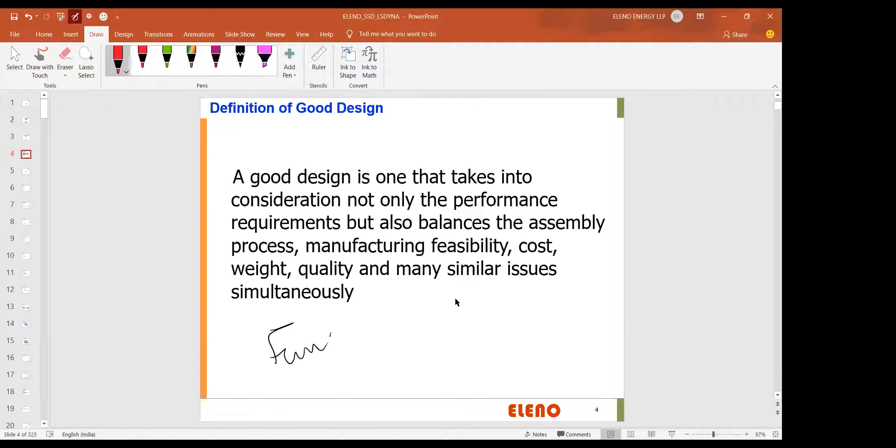Okay, so let's start with a definition of a good design, because we all, even if we are working in CAD or in CAE, we are actually a part of a design team. Okay, so there are going to be 2 or 3 types of designs. There will be a, what I will say, a functional design where we work. So there will be 2 types: one will be functional design, and the other type will be aesthetics.

Okay, so functional design can also be of 2 types. It can be structural, or I will call it engineering, and there is another part which is ergonomics. Okay, so there are things which are not really mattering to the structural aspect, but they are more mattering to the ergonomic aspect, ease of using it, and all these things. So functional design will be either engineering or ergonomics, and then you have another type of design which is aesthetic, which we all know what it is, right?

Okay, now let's make sure that we are taking notes wherever we feel to. Okay, so I'll just read this definition for you guys: a good design is one that takes into consideration not only the performance requirements but also balances assembly process—this is very very important—manufacturing feasibility, cost, weight, quality, and many similar issues simultaneously. This is very very important.

So you can have a design which looks aesthetically very pleasing, but it is made up of a material which is of exuberant cost—it's just not going to play any important role there. Okay, so a good design is one that takes into consideration not only the performance requirements but also balances the assembly process, manufacturing feasibility, cost, weight, quality, and many similar issues simultaneously.

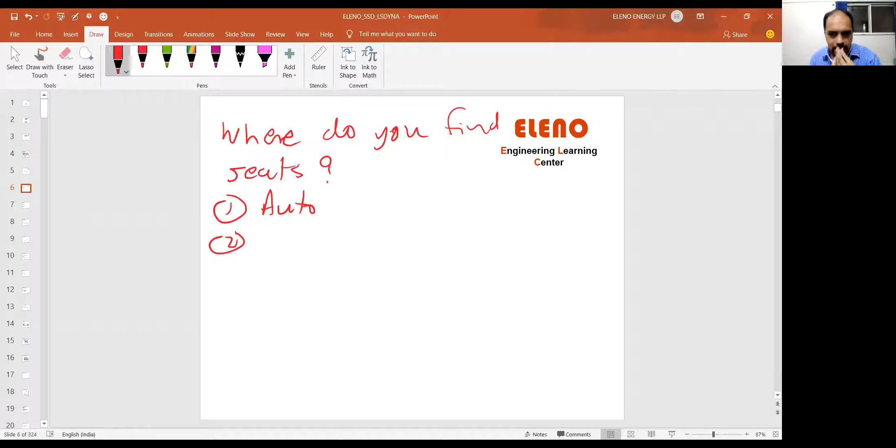It's a car, okay, automotive is one domain. Second, trucks, okay, so I will describe it as automotive. Aeroplane is another domain, aerospace, I will write it down. The third is passenger vehicle, commercial vehicle. So automotive, I will classify as PV and CV. Is this making sense? So automotive, it will be PV and CV.

Trains, yes good, so trains are there, that is railways. Everywhere where we need seating, yeah I know, correct. Transportation, ships, boats, correct. So first is transportation. It can be auto, it can be aerospace, it can be trains, it can be boats, it can be any mode of transportation, right? And then you have some static offices.

Is it right? So theaters, correct Utkarsh, you're right. And even there is a regulation, so it is theaters, that is public places, correct. And there are folding seats and stadium seats. Home, yes, offices, home, library, everywhere you will find a seat, correct.

So roller coasters, yes, it's pretty much an integral part of a roller coaster. Otherwise it's just going to be a pathetic part. But it's just a list, you guys listed it down, correct.

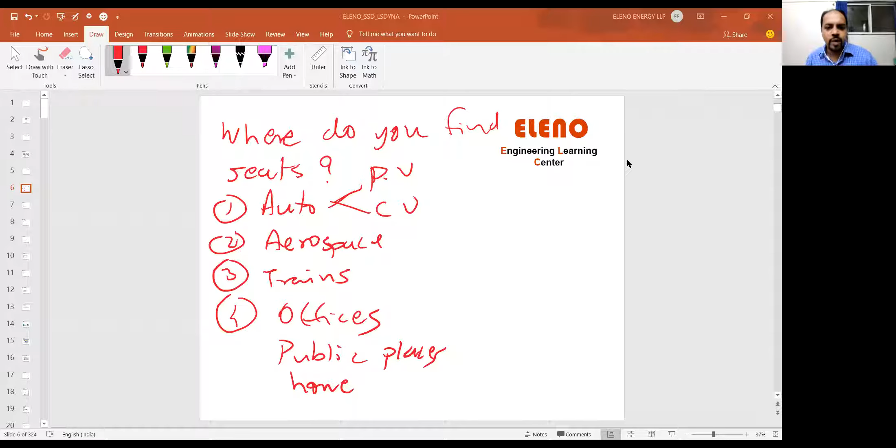So what I want to convey to you guys is, the product is called a seat, but it has various applications, am I right? So the applications are different, and according to application and according to this design definition, you have to actually think about certain tests. And this is actually called, this is something very very important. I try to cover this in the first session of LS Dyna training, which is design validation plan. How are you going to validate your design? Okay, so who decides design validation plan?

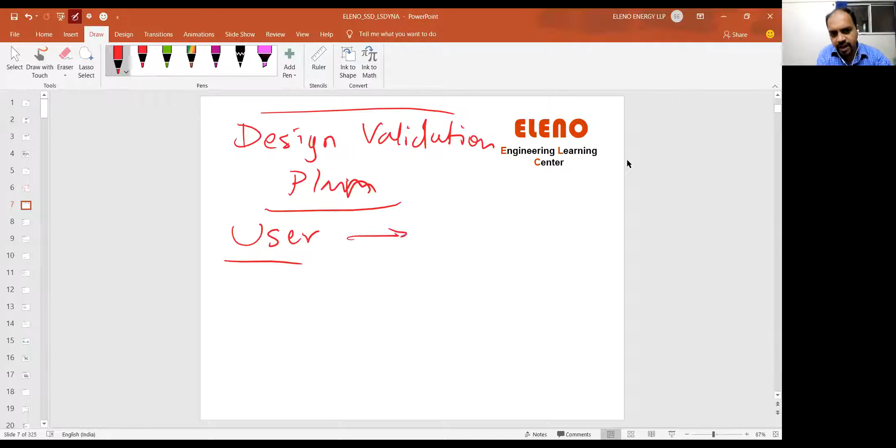A user decides design validation plan according to the application. What do you mean by this? I simply cannot use a train seat in an automotive, correct. It's too bulky, it's not having any adjustments, and it's really really heavy, and it's not made for that particular purpose. It's not public transport, it's maybe personal transport where we have to design a seat taking into account certain considerations. Okay, so every single seating system has to undergo a design validation plan.

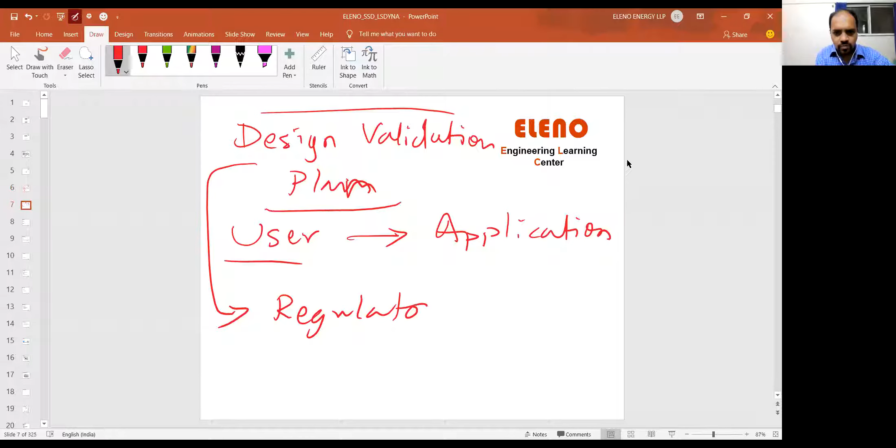It sometimes can be regulatory. Not all of it is regulatory, but most of the time it is regulatory. What do you mean by regulatory? It is mandatory.

For example, furnitures, okay, you may think that anyone can come up with a chair and then just go ahead and launch it. Now it's possible to launch, but the thing is, in the Western world or in developed countries, there are regulations for furnitures because you cannot just fall down. It's called workplace safety. So even if these chairs, revolving chairs, are for static use, they are to be designed for balancing the center of gravity. They are to be designed for maximum weight carrying capacity, and they are to be designed for durability. Okay, so there are regulations, there are some standards. They can be internal standards, they can be government standards, but there are going to be compliances.

Okay, but when it comes to seats, I wrote that in a post. It's the second costliest part or sub-assembly in the entire vehicle. Even the body is not that costly. The second costliest part after drivetrain, it can be IC engine and the gearbox, or it can be the batteries and the controllers and the motors. But that will always be the first costliest part, and the second costliest part will always be the seating system.

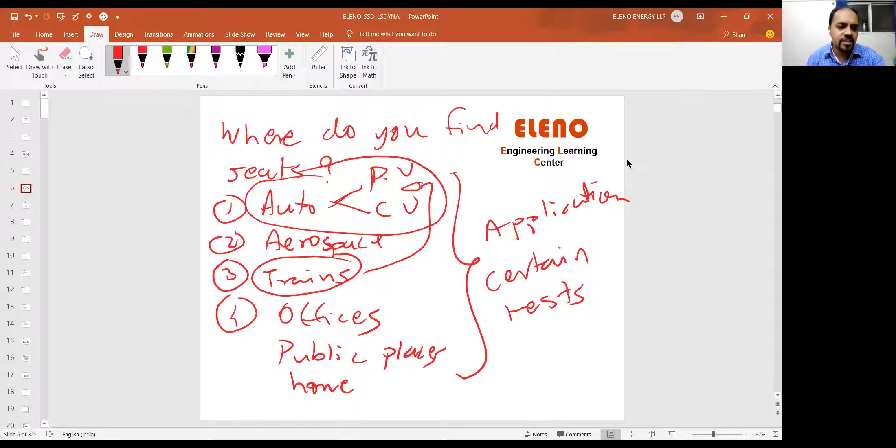And the reason for that, somebody asked me a question why it is so costly on LinkedIn. The reason why it is second costliest is regulation and compliance. Okay, you need certification, you need a lot of certifications related to testing. Okay, so this is very, very important.

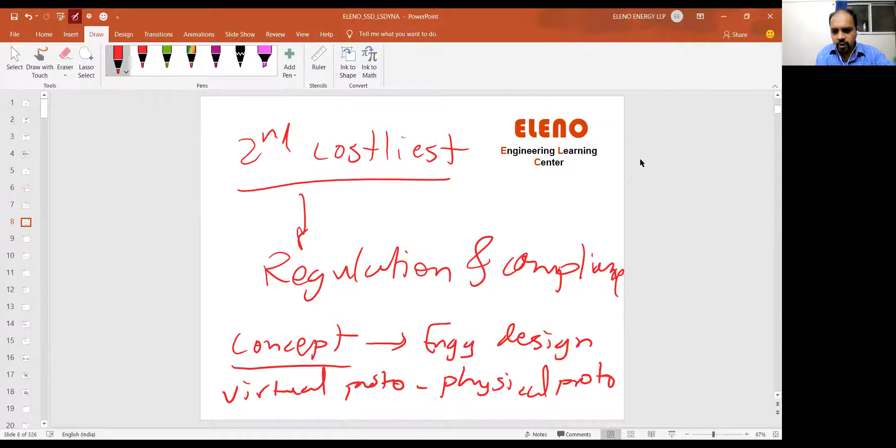For any type of compliance to be done, you have to undergo a process of: concept, engineering design, virtual prototype, physical prototype, limited production. Limited series production, LSP it is called, and then you have full series production. Okay, this is the path you guys have to follow, or any product has to follow if it is going to be a regulatory stuff. And after physical prototype, there are going to be regulatory tests.

Getting my point? What is this cycle?

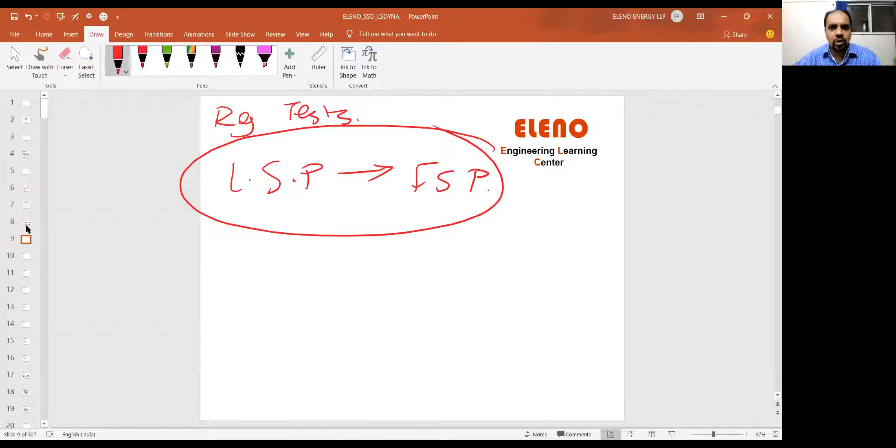It's not just that you have a concept and you launch a product, or you design a CAD, create a 3D print, generate a final production line, and then you're good to go for sales. That's not going to happen. You have to go through a very long and tedious process, because the concept and engineering design itself struggle to coexist. The concept can be exuberant, and converting it into the engineering design is itself a big process. Those of you who are working will understand this.

And then you have a virtual prototype, which is nothing but CAE, which is what this session is for. And then you have a physical prototype, and then you have to go for regulatory tests on the physical prototype, to make sure everything passes. Go for limited series production, then final series production, and your product will be ready for market. Is this all making sense?

I'll give you some 15 seconds, just write it down as a summary. Why the seating system is the second costliest part - this is all applicable to the full vehicle also. But when we are talking about the full vehicle, we are actually talking about integrating various sub-assemblies. Type done once you are done writing.

Okay, some 15 seconds, 10 more seconds. Quick, we have to cover a few things, and I really want you to get a hang of what is a seating system. Type it done once you are done writing. Quick - Tejas, Suresha, Udani sir, yes, Kannan, good, done.

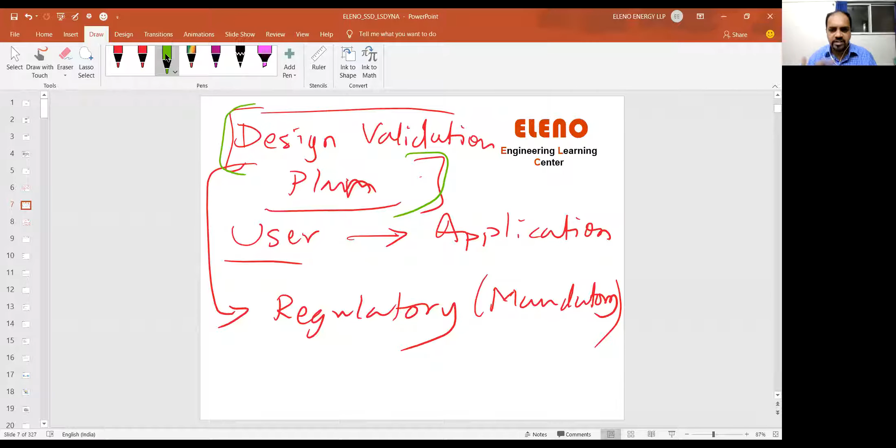It is related to public and occupant safety concerns, so it has to pass through. Yes, correct - that process is costly because it involves physical prototypes, it involves dummies, it involves the testing lab, it involves many things. That's why it is costly, but that is applicable to the full vehicle also. Still, full vehicles are not that costly because they are typically stamped parts welded together, whereas here you may have mechanisms and various other stuff.

Okay, good, so let's move ahead with functions of seat - that is what we are going to discuss. Let's rearrange this. Function of a seat - let's concentrate and make sure we are concentrating on passenger vehicles only. Can you type in PV, passenger vehicles? PV is like personal transport, private transport, passenger vehicles. Type in PV so that we are all in line.

We are only concentrating on passenger vehicles right now because that is the severe-most case, that is very, very severe. Guys, I want you to be active - quick, quick, quick, quick. PV, PV, PV - yes, good.

So there are four functions of a seat. The first is support the occupant, the second is position the occupant, the third is comfort, and fourth is protect. Support, position, provide comfort, and protect - we will discuss all of these in little detail.

So what is a support function? Very simple - the structural integrity of a seat should be sufficient enough to carry the passenger, whether in a static or dynamic environment. If you're taking a corner and the seat bends, that's not structural integrity, that's not support, right? If you are sitting as an occupant and nothing happens, everything is safe, but somebody who is overweight tries to sit on the seat and it deforms or doesn't function properly, that's not something called good support.

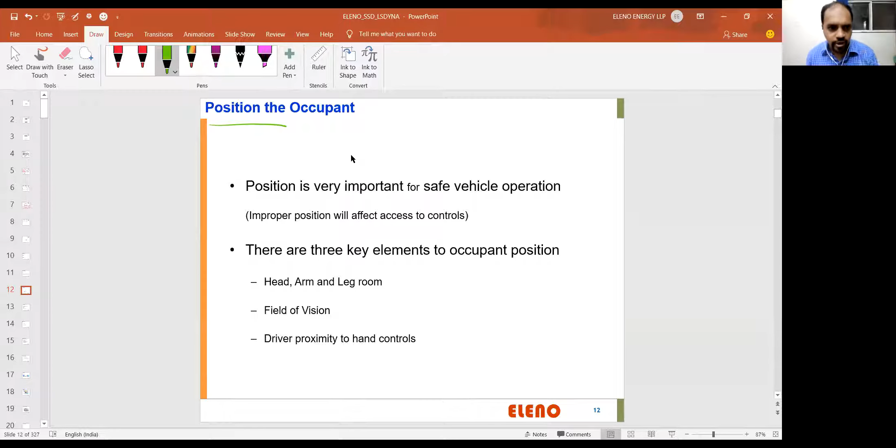Okay, so position is extremely important. Field of vision - I talked about this - should have minimal obstruction from the steering wheel, instrument panel, roof line, belt line, and pillars. What is a roof line? We all know what a roof line is, right? And belt line - belt line is something which is going to be exactly at the shoulders, whatever you see at the end of the door panel, where your window rolling starts. That's your belt line. And pillars - A pillar, B pillar, C pillar - all these things are going to be important as far as the obstruction of field of vision is concerned.

You should not have these obstructions. You can read reviews where there are vehicles with thick A pillars for safety purposes, and they have a blind spot - you cannot see while turning. Okay, how many of you are regularly driving cars? Just type in 'car' - how many of you are regularly driving cars?

Regularly, I'm not saying that you have a learner's permit or a license where it's written that you can ride a car, but you are really not doing it regularly. So there are quite a few people who can ride a car and they can understand it.

The A pillar, if you are sitting in a driver's seat, and if the A pillar is very thick or B pillar is very thick, you get into the blind spot mode. Making sense? So driver should be able to see properly in all mirrors. And who is going to do that? The seat is going to do that, guys.

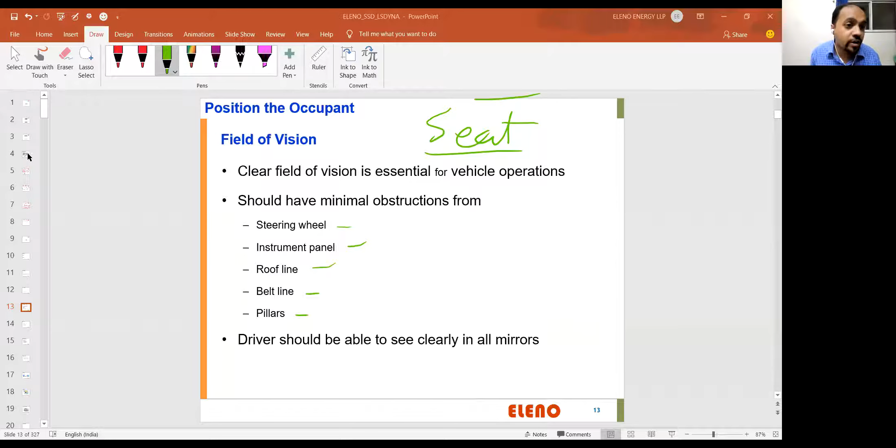Yeah, makes sense, correct? Okay, so this is all to do with seat. Now let's go back to our definition, guys. A good design is one that takes into consideration not only performance requirements. So even if my seat is fantastic structurally and it's not actually creating or balancing cost, weight, quality, and many similar issues.

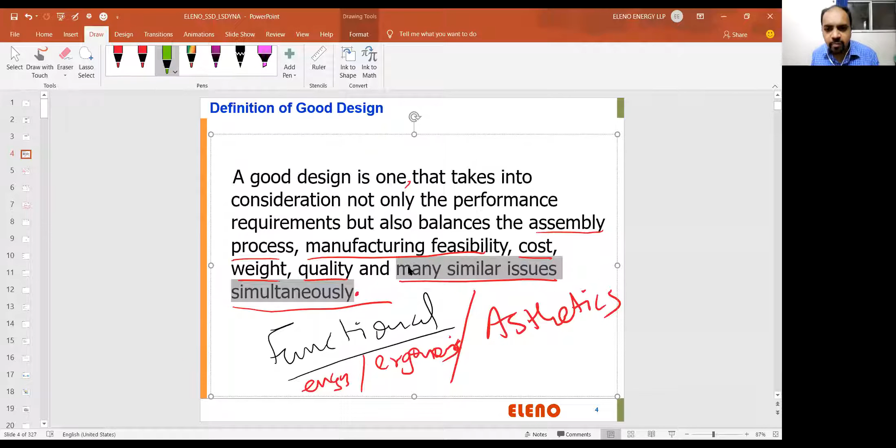This 'many similar issues' includes the field of vision. Can you see it? Can you not see it? Are you getting a lot of blind spots? If I'm 6 feet 5 inches, can I actually get accommodated in the car or not? Am I really made for this car or not? Or if I'm a very short person, if I adjust my seat to the full forward pull-up position, am I still able to see or operate the vehicle or not?

All these things come under many similar issues in a good design. Okay, clear? So let's move to our next point, position. Driver proximity, this is the third point in position of occupant, which is our second base point. The first was, what was the first point, guys? Support. Okay, and this is our second point, which is position.

Driver must be able to reach primary controls while in driving position. Driver should be able to reach secondary controls while in a driving position. So primary controls are, of course, the steering wheel first of all. Then you have indicators, turn indicators. Then you have the pedals, operating pedals, accelerator, brake, and clutch, and the gear lever. So your limbs should be in a position to operate all these primary controls.

The wiper stick is a safety feature, not a fancy feature. You will not see a car which cuts costs by not giving wipers, correct? So it's a safety feature, it's a primary control. Hazard light is a primary control. Then you have lights, the headlights are primary control. Turn indicators are primary controls. All these things are primary controls.

Driver should be able to reach secondary controls, which are like air conditioning, operating the volume, or maybe adjusting the inside rear view mirror a little bit. Then it can be the sun visor, operating the sun visor. All these things come under secondary control. So driver proximity to hand and leg controls, that is something very, very important.

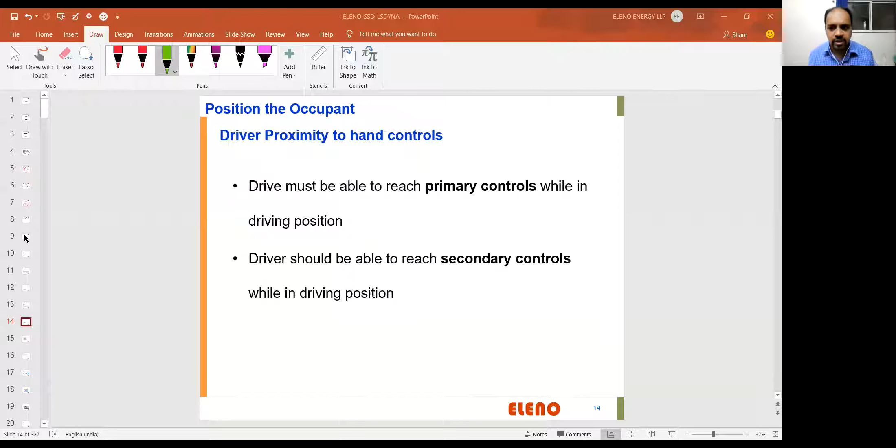Good, nice. Now I want you guys to summarize. I'll just go through it, and I want you guys to summarize in 30 seconds support and position, these two functions. Write in your own words. These slides have no meaning if you don't write it down. So write down in your own words. I'll just scroll it through.

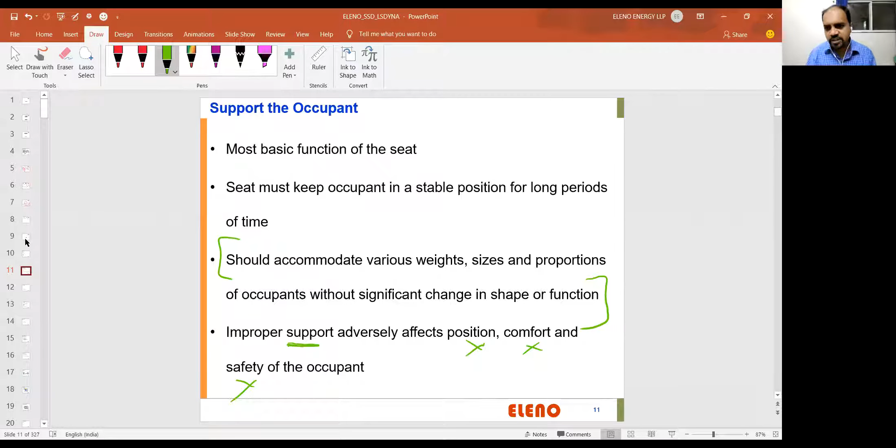Okay, so function of seats: support, position. We have discussed two functions, support and position. So support the occupant is the most basic function. Don't just write it down as it is, summarize it in your brain and just write one liner. Support the occupant, most basic function, and all these things. Just write this down. I'll try to make it two slides at one time. Wait a second.

Yep, can you see this? On the left you have position the occupant, and this is something which you have to write down. Okay, these three slides: position the occupant, field of vision, and driver proximity to hand console.

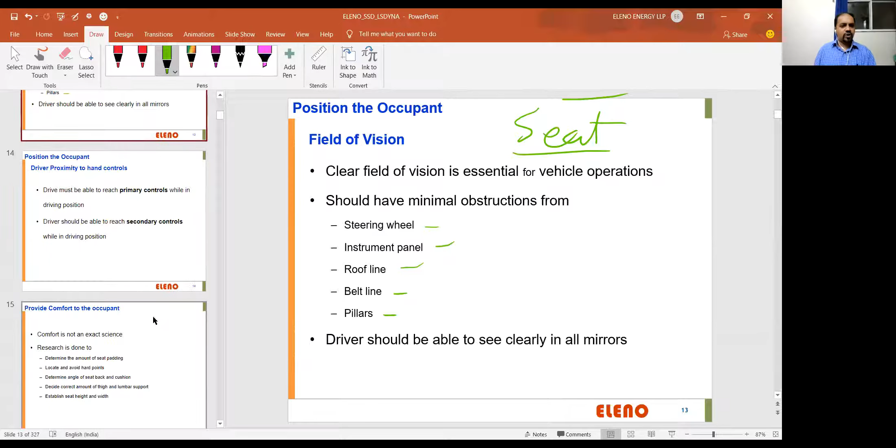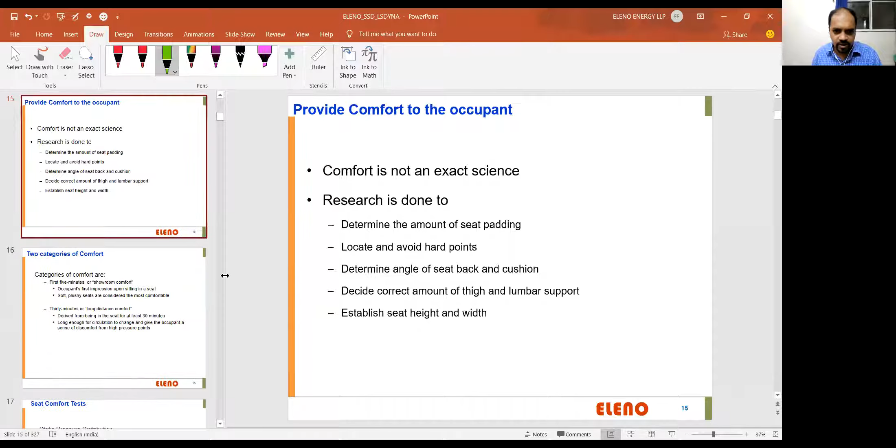Okay, so let's move on with a very, very important type, which is comfort. Comfort is a very, very important aspect, and it involves a lot of CAE nowadays. So provide comfort to the occupant.

Comfort is not an exact science. The research is done to determine the amount of seat padding, locate and avoid hard points, determine angle of seat back, decide correct amount of thigh and lumbar support, and establish seat height and width.

So basically comfort is not an exact science, it's all relative. Everyone is going to have some different perception about comfort. Some may like a hard seat, some may like a soft seat. Soft seats will not provide you support and then you will feel fatigue, numbness. Hard seats will not provide you comfort and still you will feel fatigued out and then you will come out of the car in lesser time. So it has to be a balance for sure.

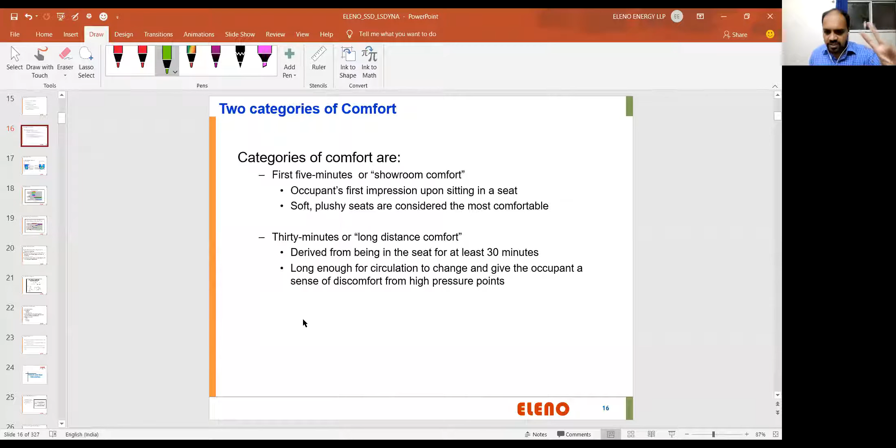Now for that, typically there are going to be two evaluation methods. This is what is written here. The first evaluation method is called 5 minute or first 5 minute showroom comfort. What do you mean by this?

It's like you are trying to go for a test drive on a two-wheeler. On a bike, you are going there and you are going to have a test ride of whatever car you wish to buy. And as soon as you arrive in the showroom, because you were sitting in a harsh environment in a two-wheeler, in the first 5 minutes you will feel that okay, this is very, very comfortable. Soft plushy seats are most comfortable, and all these things you will feel that okay, this is very comfortable. But beware that this is not actually the test ride.

You have to at least go for 30 minutes, 1 hour. You may have to ask your friend to lend a car. Make sure that it is there with you for 1.5 days and try to go on some larger sections and all other things. This is called long distance comfort. So this is not a science, this is all to do with your own self. Then you can have some padding done, and all these things. There are seats, or seat covers, which are very thick, and all these things are there.

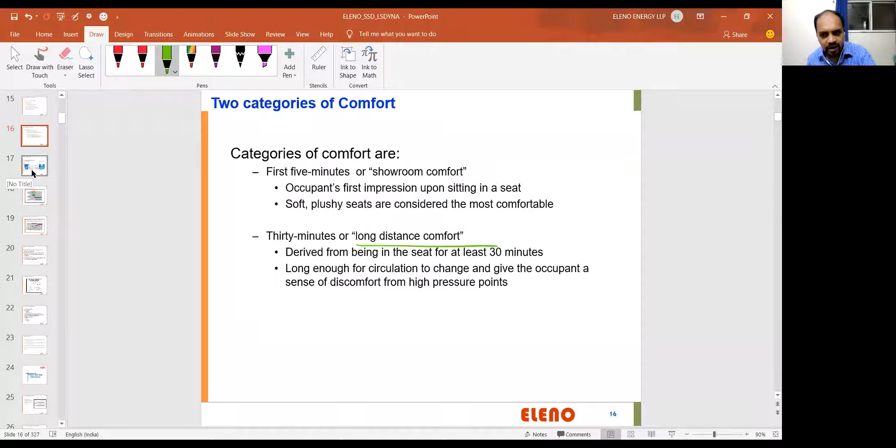But just understand that there are going to be two categories of comfort. Not very important, but it is still there. It matters a lot, it matters a lot when you buy a car. Now this is something which is important, and this is all done in CAE, very specific.

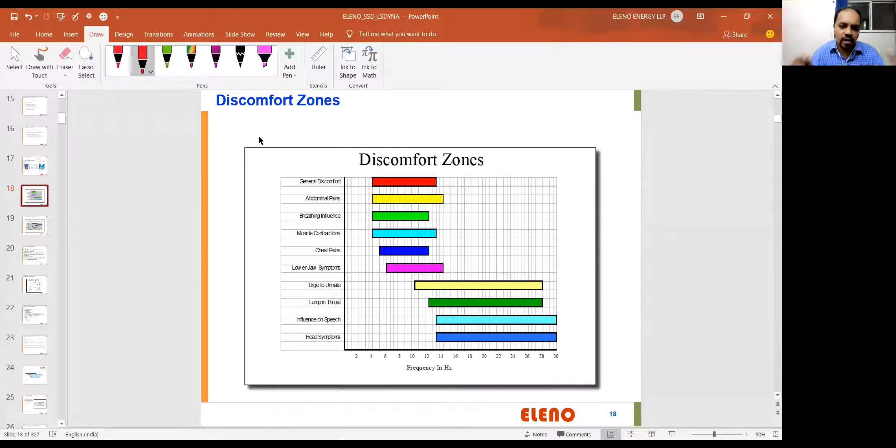I'll not go into detail on the discomfort zone because it keeps changing, and this is somewhat older data. But what I wish to share with you is this: the human sensitivity range is 5 to 16 hertz, and this part is not changing much.

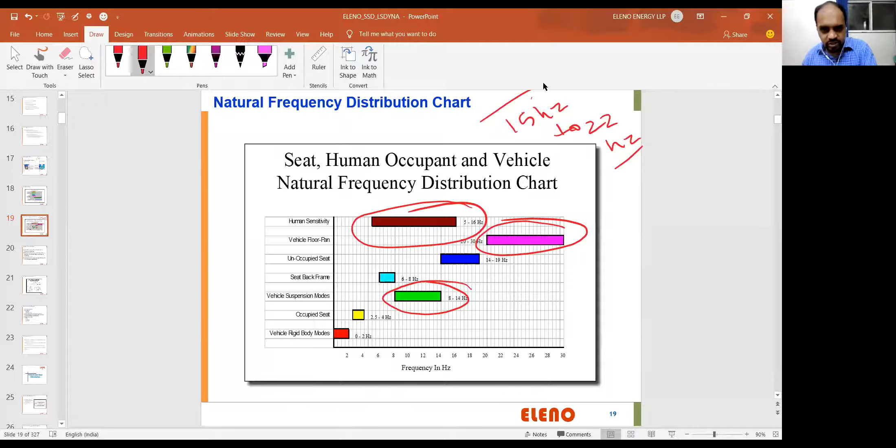Typically, the suspension modes are 8 to 14 hertz, and the vehicle floor pan frequency is here. For seat designers, the understanding is around 20 hertz, or logically it should be 15 to 22 hertz, as the frequency bracket for the seat in a constrained position. This is a natural frequency, not an excitation frequency, of the seat structure.

This is also the designer's role, not just the CAE engineer's task, to make the seat stiff or bring the overall frequency down by changing the center of gravity and such things. Comfort is also related to frequency. If you have frequency matching resonance, you will feel dizzy, feel that the vehicle is not good, and feel an urge to vomit. That's not good.

So these are the frequency ranges we, as CAE engineers, typically work between: 15 to 22 hertz as natural frequency, with constrained mode shapes, meaning you bolt it at 4 locations and do the modal analysis. You can do this in Nastran, LS-DYNA, Abaqus, or OptiStruct, Radioss—anywhere it's possible. This is essentially doing a test on a virtual prototype.

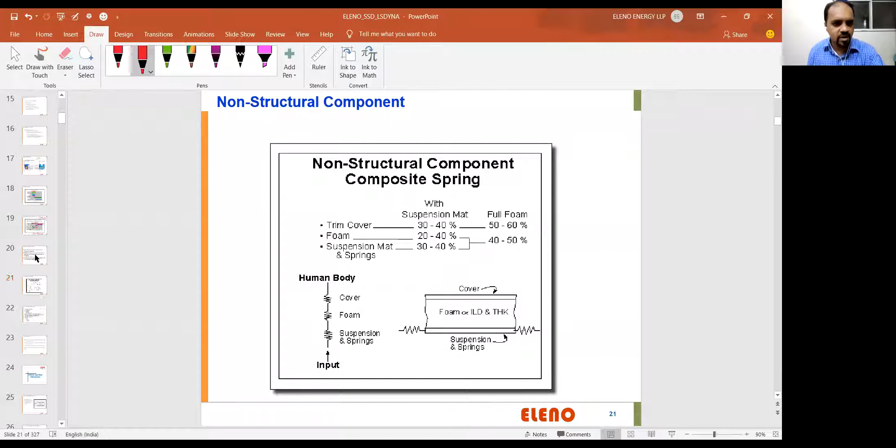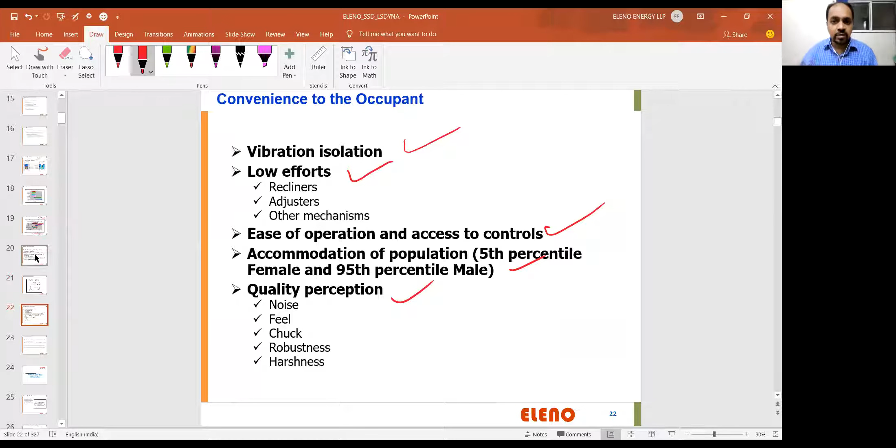So this is natural frequency versus human frequency, very simple—just a spring and mass system, which I have circulated here. Regarding vibration isolation, you should have lower efforts, convenience, ease of operation, accommodation of population from 5th percentile to 95th percentile, and quality perception: noise, feel, chuck, robustness, harshness, buzz, squeak, rattle—this is the BSR issue, and NVH: noise, vibration, and harshness.

So BSR is buzz, squeak, and rattle. While driving on a rough road, if there are grinding sounds, that's BSR. Or if you're adjusting your seat height and there are squeaking sounds, that's not good either. This all comes under BSR issues—structural, non-structural, engineering, non-engineering—but altogether it makes a good package.

Now the next part is very crucial. We discussed comfort or convenience, where you put less effort to adjust the seat, less effort to move it backward or pull it forward—all these come under convenience. Whereas occupant safety is what actually makes the seat a costly affair.

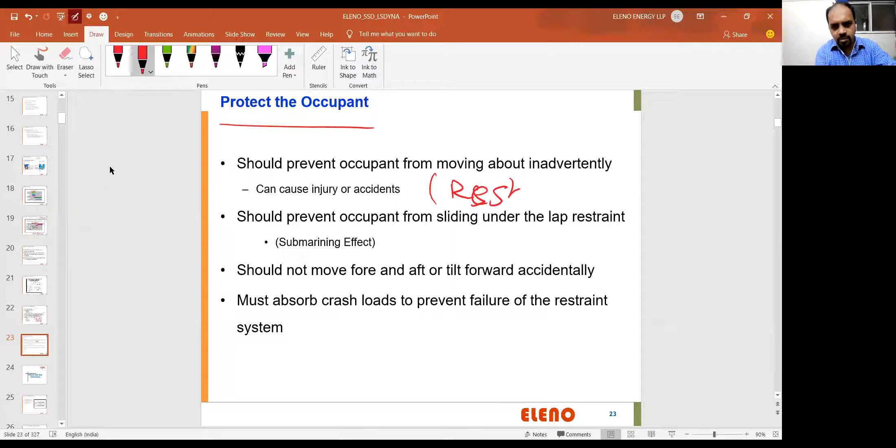It should prevent the occupant from moving about inadvertently—the occupant should not be allowed to move in the event of a crash, but this is not possible without a restraint system. So the restraint system is important; that's its task. It should prevent the occupant from sliding under the lap restraint, which is submarining—very specific, but we'll discuss that. It should not move fore and aft or tilt forward accidentally, meaning there should not be any mechanism failure.

No mechanism should fail. The mechanism should be intact. In event of crash also, they should perform at their 100%. Must absorb crash loads to prevent failure of the restraint system. So this is what we are discussing.

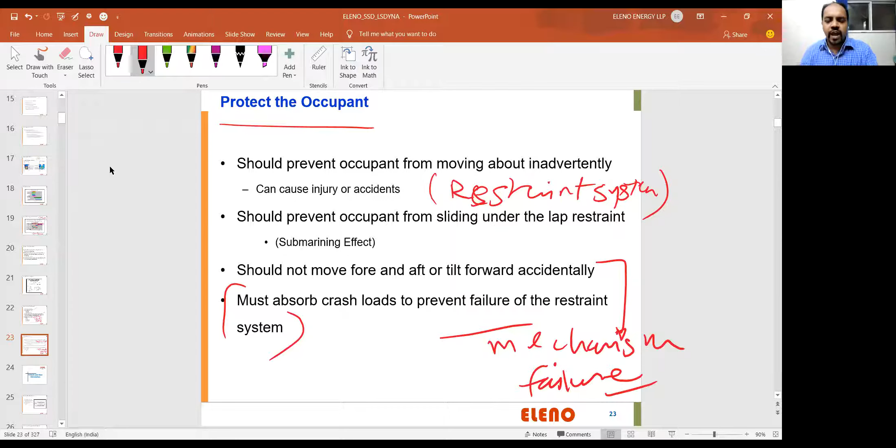Now the protection part has to be judged based on 3 types of design principles. Let me write down these 3 design principles. Very, very simple: static load, static design. Those who are new to this will understand, but those who are already my students in LS-DYNA batches will relate it to the practical stuff.

So there are some load cases where the load will be static and the design will also be static. Then there are cases where you have dynamic load, which is converted into an equivalent static load. So there is dynamic load, static design.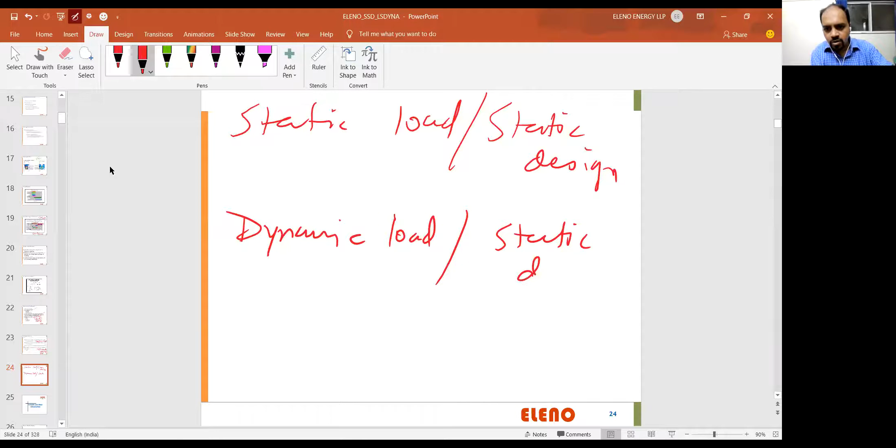Then you have a crash type of sequence where there is going to be luggage retention, a frontal impact, or a rear impact. All these things come under dynamic load and dynamic design, where your regular principles of static design are not applicable. You have to do a full-fledged analysis, and only then will you understand whether my system sustains the load or not.

Typically dynamic load, dynamic designs are one-time tests. It's not reusable, you're not going to use it again. It goes into the plastic deformation stage, into distortion energy theory. You measure von Mises stresses and all these things, which is typically a mechanical engineering core part of strength of materials and design of machine elements.

Static load static design, dynamic load dynamic design, and dynamic load static design. So there are various ways in which you are supposed to test a seat or a product. But a seat typically undergoes all three types - that's the important part of a seating system.

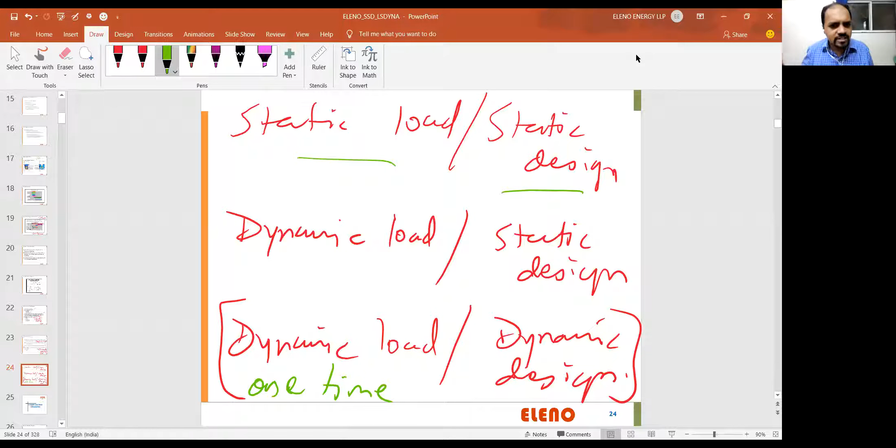What is happening when you are using a vehicle as a regular A to B transport mode? You are doing a static load and a static design, because that is normal - you are not abusing it. When you have dynamic load and static design, that means you convert a dynamic load into a static equivalent by applying some dynamic load factors, but your design principles are still static. P by A equal to sigma, and all the theories of failure you will use, bending moments you will use, and then you say this is safe, this is not safe.

But where there is a dynamic load, which is in the time domain, it becomes tricky, because this is like a one-time test and you have to focus on how much energy you are absorbing or not absorbing. Sometimes you have to absorb a lot of energy, and sometimes you don't - you just have to make sure you are a rigid link and pass it on to the next part.

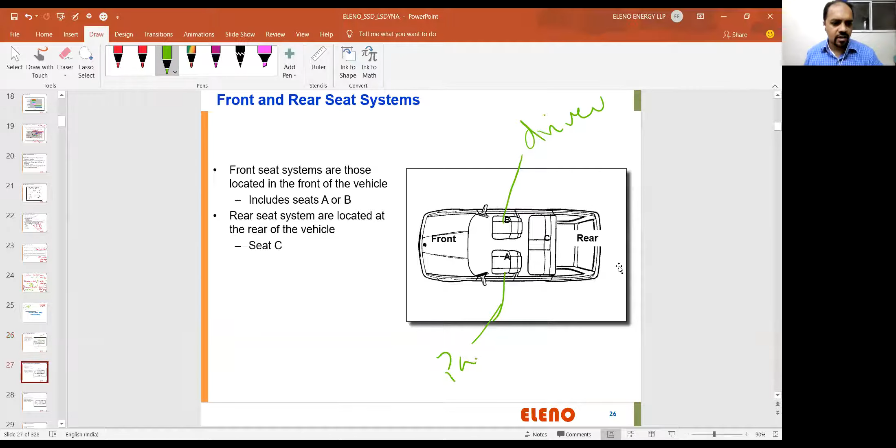Front, rear, we all understand. A, B - A is going to be the passenger side for left hand drive or right hand drive markets. So this is driver side, this is passenger side, and then you have rear passengers. Then driver side, passenger side, then center line of a vehicle, and the important aspect here is right hand and left hand. This is not going to change for any vehicle.

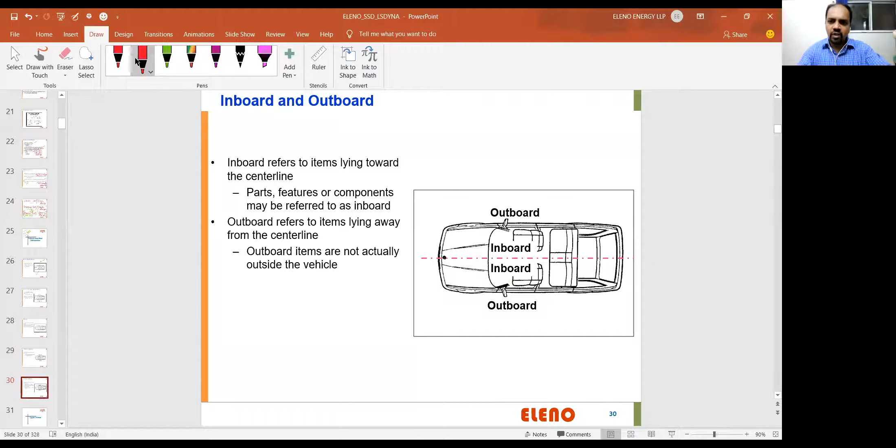So in North America, the driver is going to sit here. In Asia and UK, the driver may sit on the other side. Very simple, it's 50-50%. Inboard outboard is important - whatever is coming close to the center line will be called inboard, and whatever is going away from the center line will be called outboard. So there are two terms which are interchanged: left inboard, left outboard, or right inboard and right outboard. This is how the nomenclature works typically.

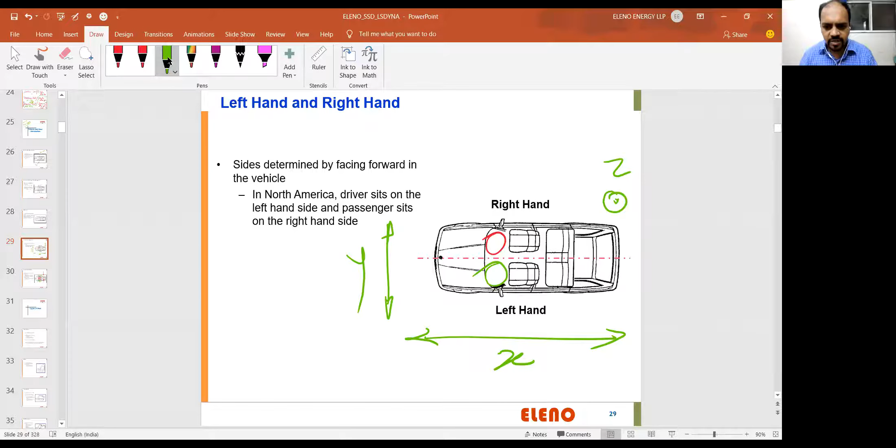Now what is important, one thing missing is, if I have a vehicle, always the length of vehicle is considered in x-axis, 100% of the time. Any vehicle manufacturer - bus manufacturer, car manufacturer, tractor manufacturer, anyone - the longitudinal dimensions are always x, width of a vehicle is always y, and the height of a vehicle is always z, always 100% of the time. So there is going to be length, width and height of a vehicle, which is 100% of the time this one. Now the next part is types of seats.

We'll talk about types of seats, and then I will be jumping onto the regulation part, which is a CAE regulation part. This is like a first session, orientation session for the CAE batch. Already 6 or 7 students are enrolled to this batch. So I just want to give you an experience in the first session that this is going to happen in the next slides or next training parts, which are all going to be live. So this is going to be a live session for 1.5 months next.

So 4 basic types of seats are there. OEM decides type of seat according to the vehicle styling, seat system function and target market segment. Front seats are typically adjustable. Rear seats are also adjustable, they are typically called as captain seats - in Innova or in some 3-seater cars, you may have seen that. And then there are rear seats which tend to be supported by the vehicle body, BIW.

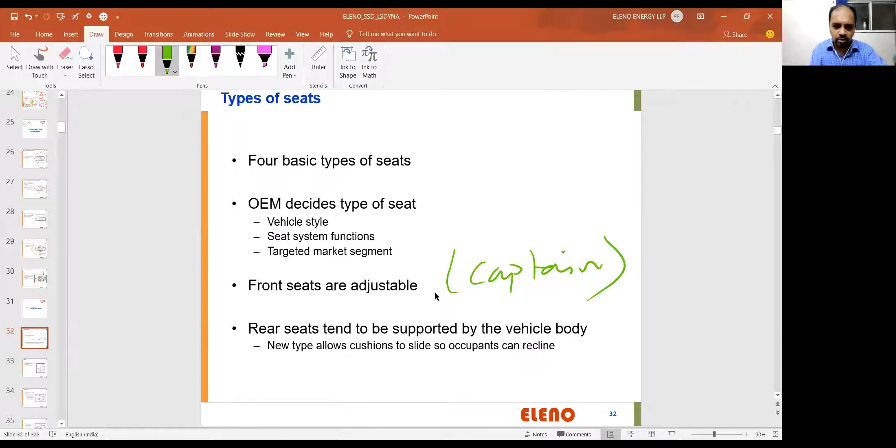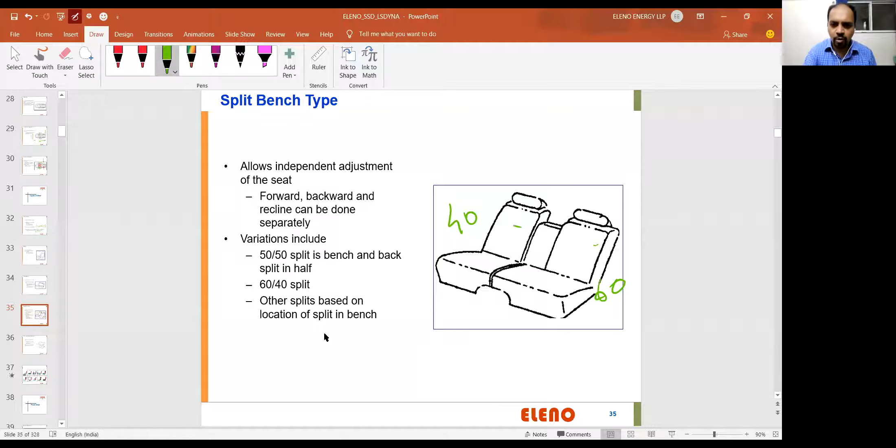Then you have single cushion and back is split. So now what is this cushion and back? Basically the structure which supports the back is called the back structure, and the structure which supports your ischia and supports your buttocks, this is called the cushion structure. So typically vehicle manufacturers or seat manufacturers have back structure and cushion structure as their talking point.

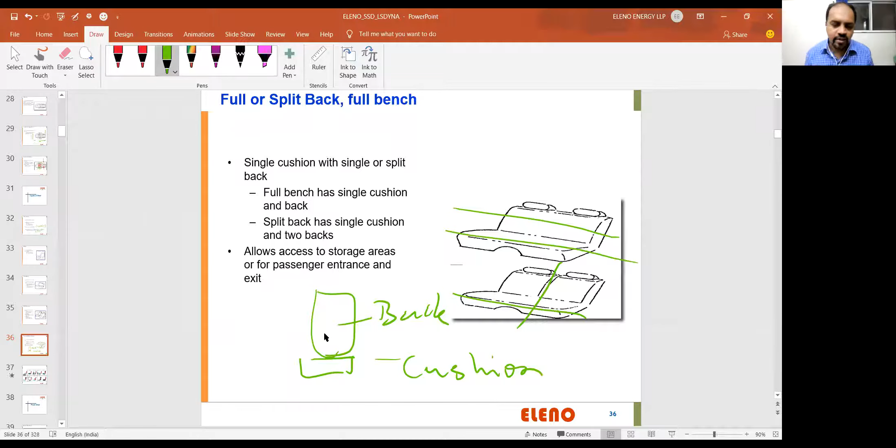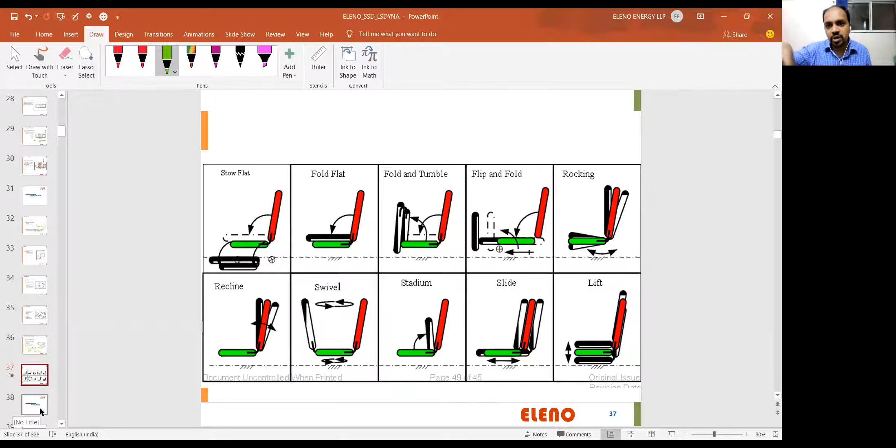Then you have this kind of flip and fold seat, rocking seat, reclining seat, swiveling seat, stadium seat, where back structure remains at the position and cushion structure folds down. Then you have sliding and lifting and all the stuff. So this is all combinations which you can see in the market, which we are anyway going to discuss when there is progression in the course. But this is just an overview, so I'll just go forward with the regulation part.

Okay, so this is the nomenclature of a seating system. I'll just show you - okay, so these are inserts and all, but I'll just show you this. Yeah, here you go. So this is a seat back and this is a seat cushion. These are the two dominant assemblies in the passenger vehicle front seat or driver seat, or I will call it as a bucket seat. Bucket seat.

These are some dominant assemblies, sub-assemblies, and they get married at the recliner. These two sub-assemblies get married at the recliner - that's what is going to happen. So this is all going to be just information, not that important.

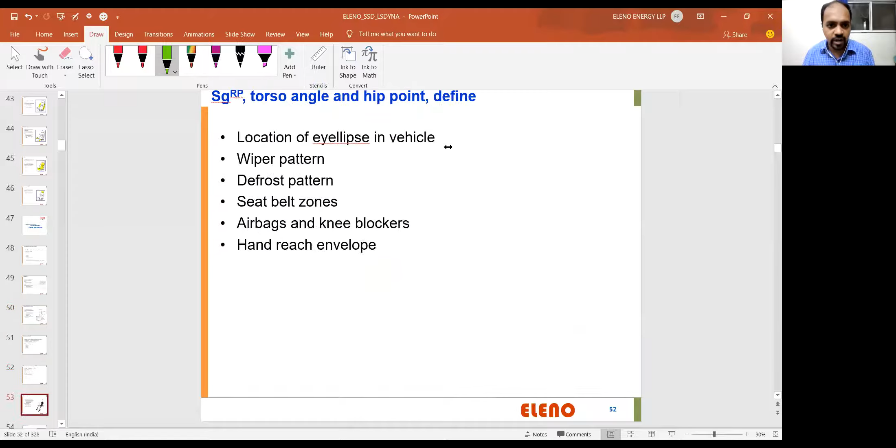H point, R point, I will explain you, but before that, let me go to a regulation. I just want to get you guys onto the regulation part. So seat frame, this is all part of a 15-hour series where we discuss a lot of things in detail.

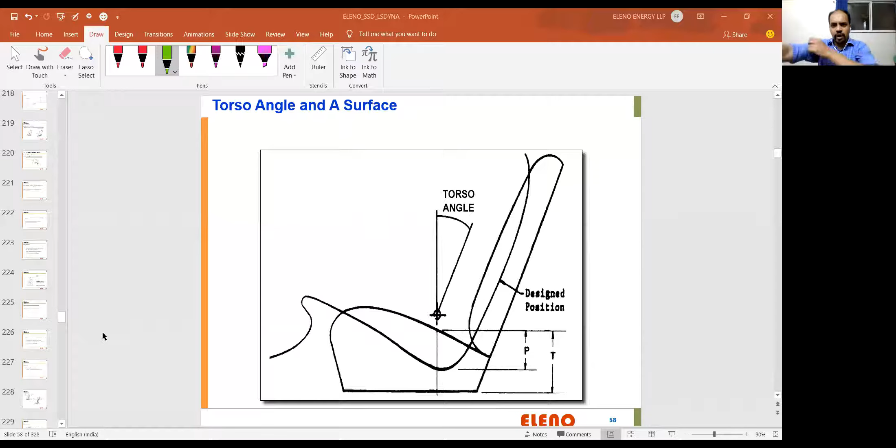Okay, I'm opening a PostDB file, which is an LS PrePost file typically. And this PostDB file will give you info. This is a free tool, so anyone can download it. Just go on Google and type in LSPP, you're still going to see a lot of things. I'll share my complete screen. Is this seat visible?

This is a dynamic load case for sure. And another thing, I'm sharing it openly because this seat is from GrabCAD. So this is not my seat, this is not any customer's seat. This is a seat from GrabCAD - go to grabcad.com and type in seat frame, you will be still able to see the seat frame.

So why I'm launching into the regulation is I just want to give you an idea what we are going to learn if somebody wishes to join this course. You may get in touch, because I'm not going to discuss anything about fee structure or details here for a very long time, just the last 5 minutes I'll flash it up. But what I want you to understand is the seating system is a very complicated piece of assembly, and that is to be understood in a detailed way according to the regulations.

It should not be understood according to the product. It should be understood according to the regulation, because people understood the product first, derived a regulation, and then the product got evolved. Okay, that is all happening hand in hand.

So if I just run this animation - this is already done, calculation is already done. This LS PrePost is an interface for LS Dyna, and it's like a pre and post processor, free of cost to everyone, there is no license requirement. So if you want to create some IGS files, step files, you can just generate IGS and step files using geometry here, and you can import IGS and step files free of cost. And you can measure everything by going to geometry tools and ID measure.

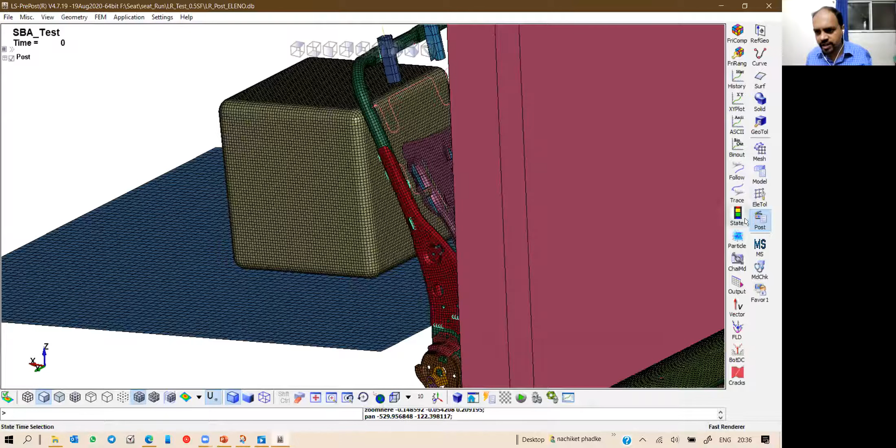You can measure everything, diameter, lengths, etc. But the thing is, this is a seat - these are just the regulatory planes to check H plane, H plus 100, H plus 150. And this is a luggage block, which is 18 kilogram mass. So how do I check it? I'll go to element tools, I'll go to measure, and I'll just check the part mass. Very simple - just go to mass and global part, and I'm just going to click here. Can you see this? The mass here is in tonnage.

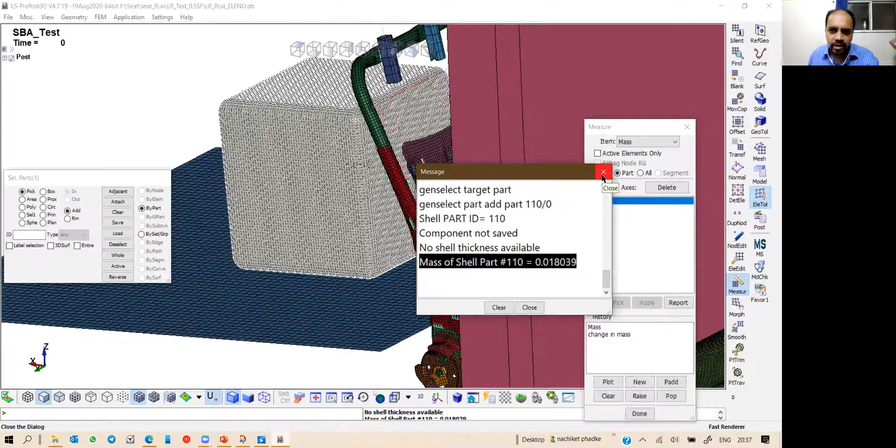Typically in LS Dyna we work with ton millimeter second - I'll explain you if you join the LS Dyna course. But mass of the shell part is 0.018039, that is roughly 18 kilogram if you multiply it by 1000. This is in ton, multiplied by 1000 to get it in kilogram. So this is 18 kilogram as per regulation.

So this is an 18 kilogram mass, and we are not giving velocity to the luggage, so the luggage is not going to hit the seat - the seat is going to hit onto the luggage because it is a frontal impact. So I'll show you how it is.

If I go to animation control and run it in a left view, let me just orient it. Okay guys, before I play it, is everything visible? I just want to confirm - type in V if everything is visible.

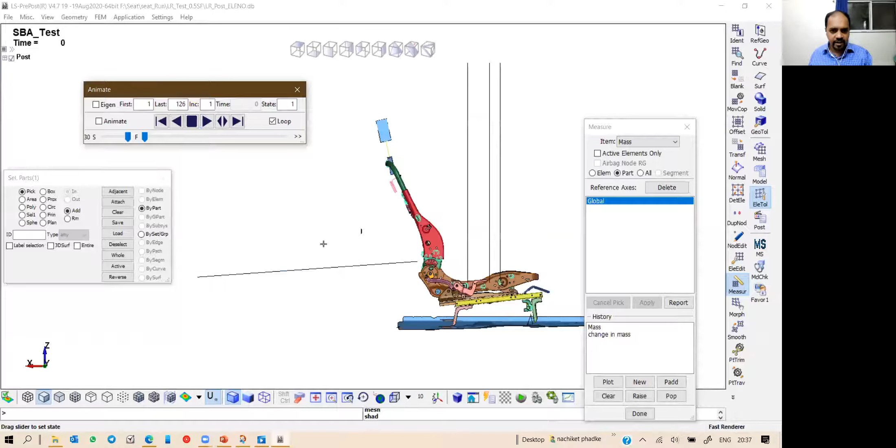Visible, right? Okay good. So if I just click here, it's very fascinating and interesting. I'll just clear everything so you can see the luggage block, and I can change the background to black, and I'll run it. What is happening?

The seat is moving rearward because that's the actual scenario in event of a vehicle crash. The vehicle is going to hit maybe another vehicle or a rigid wall, and it is going to bounce back. This crash sequence is something which is going to prevent the vehicle from moving forward, that means the vehicle floor is going to move rearward. But the luggage block is not part of the vehicle, so physics says that, as per the first law, it is going to continue to be either at rest or in motion. So the luggage block will look like it is in motion, but actually the luggage block is stationary, and the vehicle will try to move backwards towards the luggage block.

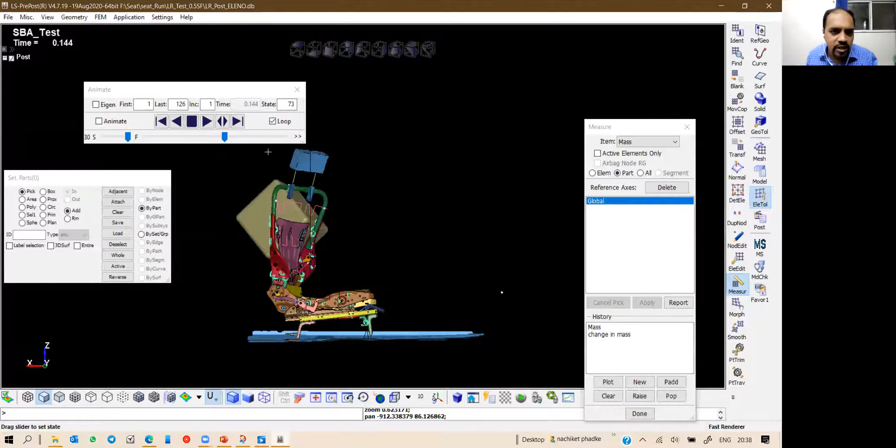So you guys can see this. Now, if I want to post-process it in a clear way, the complete running of the seat will not give me a good idea, so I'll just fix this part. I'll go to follow. Don't worry, this is a very simple tool, we have a different course for that, for LS-Prepost.

Yeah, here you go. Can you see this? So what does it look like now? It looks like the seat is actually not moving, and the luggage is going to hit onto the seat.

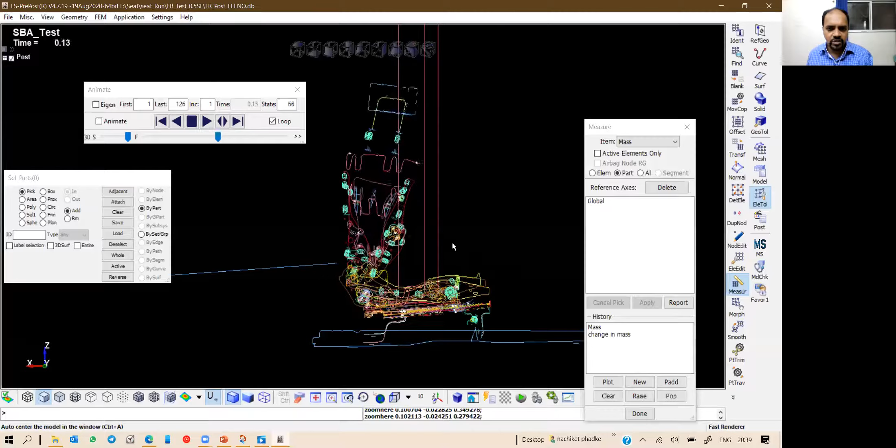If I go for a left or right view, I'll just fit it. Yeah, here you go. What I mean to check is whether the head restraint, this structural part not the foam, crosses the H plus 150 plane, and whether the foremost part of the seat crosses the H plus 100 plane or not.

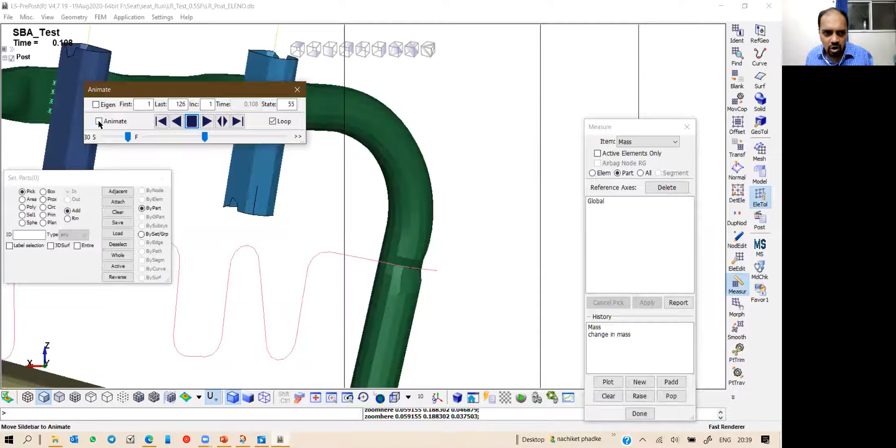Now this is dynamic load, dynamic design. Load is also dynamic, and you cannot make an equivalent of this dynamic load and run it, you will never get a correct result. So this is the first of the tests in the dynamic part.

So I'll just list it down in a PowerPoint for you guys to understand. Yeah, here you go, so these are some tests. There are some 300 slides, I don't want to go through them all together right now. So if I just go here...

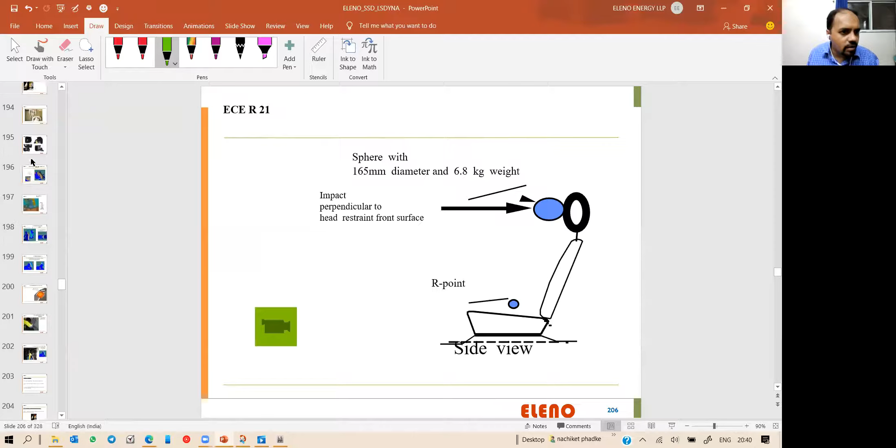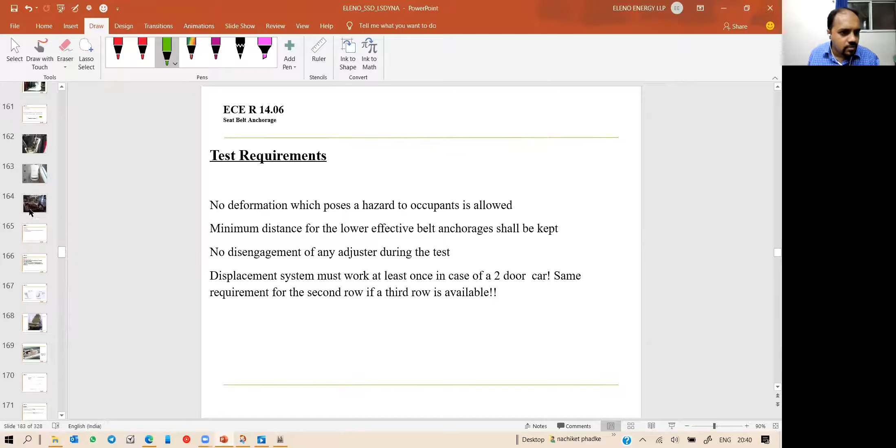Let me go to the test requirements, types of seats. This is ECE R14. Okay, so here I will write it down as regulations. I'll just explain to you what are the types of regulations and what regulations we are going to do, that means all of them.

So the regulations are dynamic loads and static loads. Dynamic loads, as I said, include luggage retention, first in the chart, as per whatever regulation, it can be FMVSS, ECE, or AIS, doesn't matter. Luggage retention has some variations but it's more or less the same.

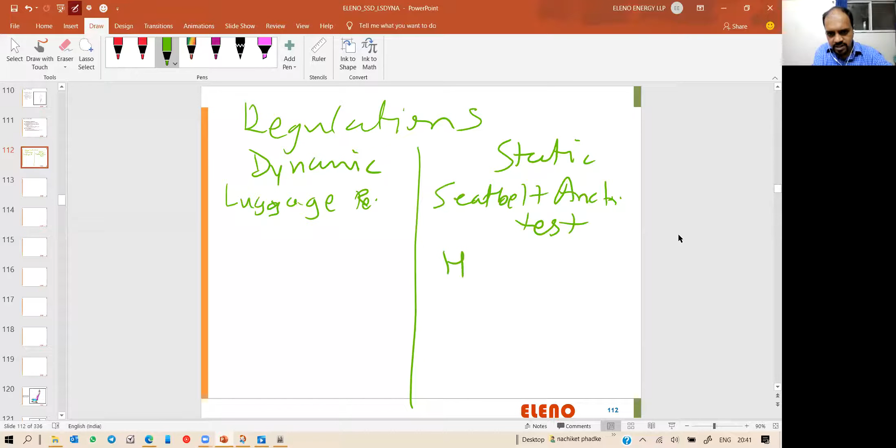Then you have static loads, which include ECE R14, the seat belt anchorage test. This is very crucial, this is a dynamic equivalent or static equivalent of a dynamic test, that is the frontal impact. Then you have the second static test, which is head restraint performance test, HRP, or SBS. HRP is a different test, and SBS, wherever you don't have a head restraint, you will go through the seat back strength test.

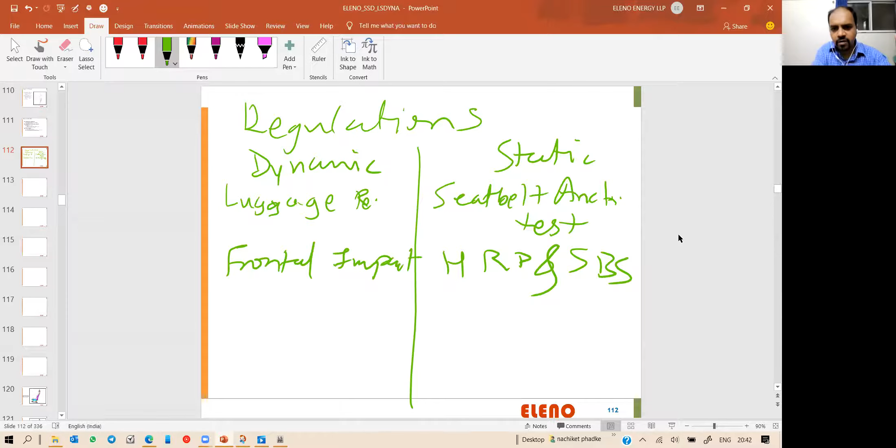Then in dynamic, you have another test, which is frontal impact with dummy. Then you have, in dynamic load case, head impact on seat. There are energy dissipation tests, ED, they are not head impacts but they look like head impact, they are energy dissipation. Then you have ADR, some Australian regulations, or ECE R14 seat belt anchorage but for child restraint. So we are going to learn about child restraints also, what this child restraint seat is and how it works. And then you have regulations which are misuse.

Okay, and you have a rear impact test with dummy, but that doesn't come under regulation. So no regulation has a rear impact test, but typically people check for rear impact after HRP and SBS. So there are minimum 7 regulations to be passed so that you actually go and do the tools and your prototype will be ready. But otherwise, this is not possible for a simple engineer. You need a team to do that.

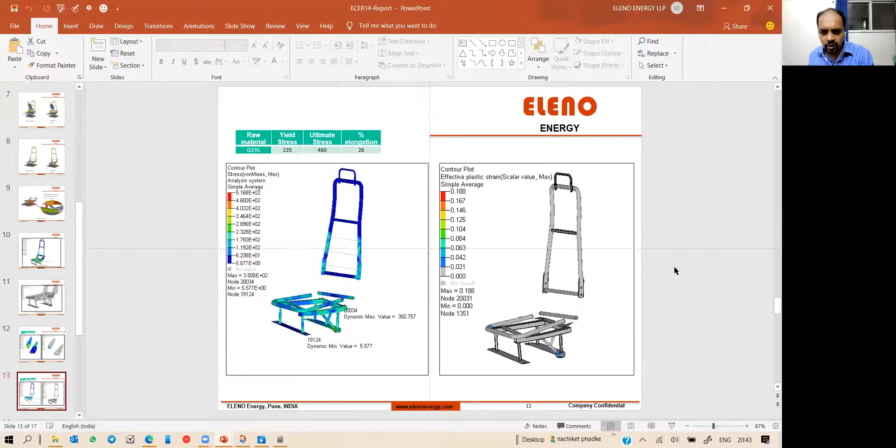And this is how the report looks like. This is how the bending looks like, the folding looks like. All these things are there. So I'm not sure whether it has a movie file or not. I think no.

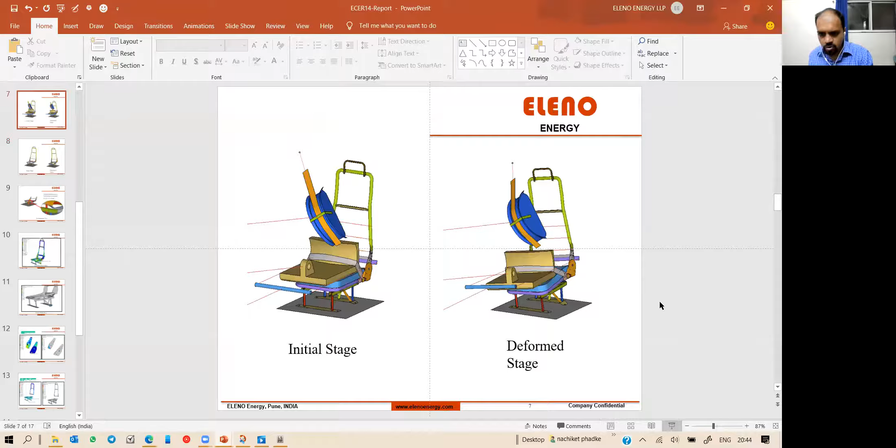And then if I just go to the folder again, the luggage retention test, and there is going to be a report. There are going to be ASCII files, the velocities and etc.

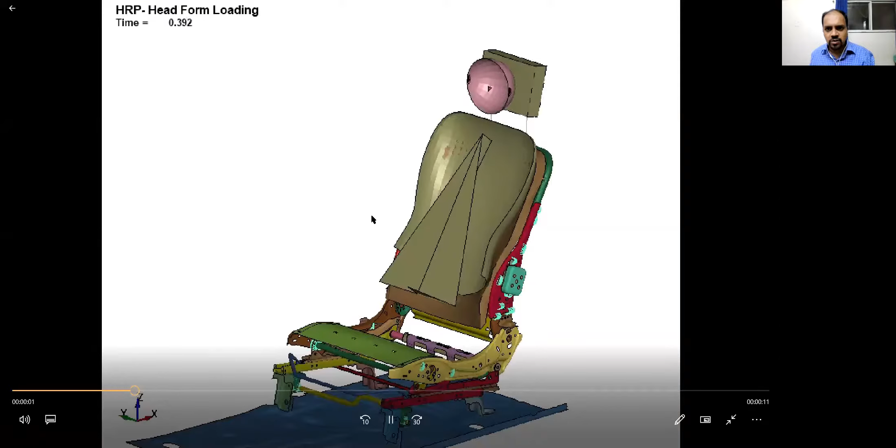Head restraint performance test, you can actually see there is a movie file here. I'll just open it for you guys for a reference. You can see this. So the back loading is done, and on the same seat, we are trying to do the loading through the head form. That loading is happening, and you can see the time moving forward, and the load gets completed. I'll just run it again for you to understand.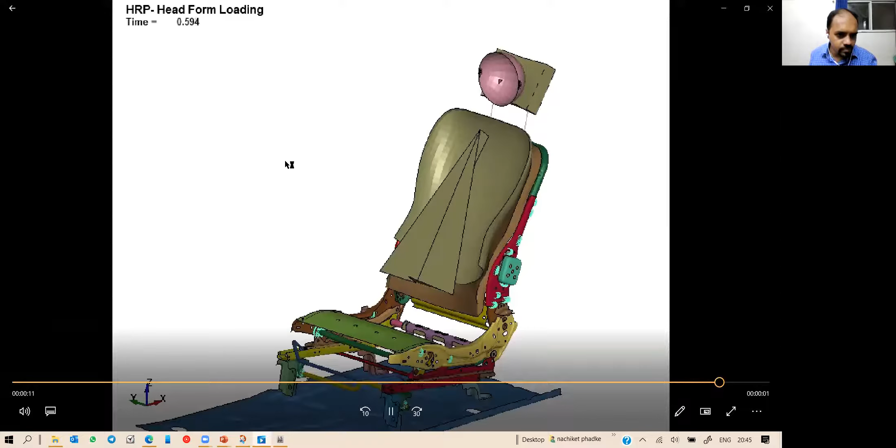Okay, there is going to be a load which is not going to cause any kind of kinetic energy. Yes, so we can check penetration in LS very fast and very accurate. Okay, so this is something which is important. Now let's come back to

Another load case, which is frontal impact. And I don't know whether I have an MVW. I don't know whether I have... okay, so I don't have the post processing or this file, but I'll just open the input file for you guys, which is master. I'm not sure whether I have a master file or not.

Yeah, include Dyna in INC. Okay, I'll just open this with LS PrePost. 4.8 is released, those who want to download 4.8. Can I get mannequin data? No, I don't think so.

Yes, George, you can remove intersections automatically in LS prepost. Okay, so this is a seat without a dummy, and if I just try opening, so this is a deformed seat. Then we have, I'm not able to see the master file. Yeah, I think it is here. Yeah, here we go. So let me open this transformation file, and it will have a dummy.

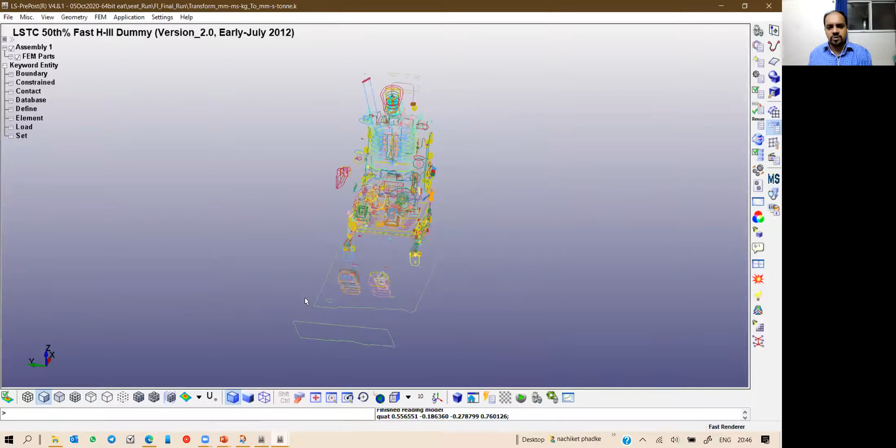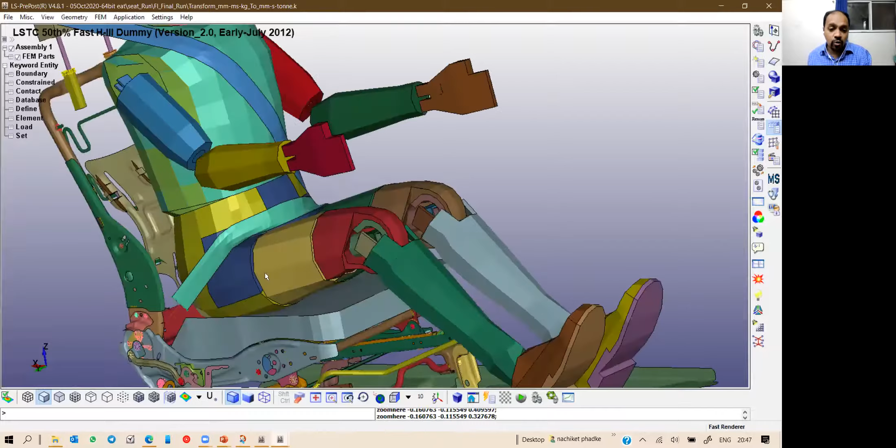So we are going to learn how to position the dummy, how to route the belt, how to do the slip rings, because there will be a slip ring here at the anchorage point, and how to design the slip ring. We are also going to learn how to define the contacts, check the penetration, how to deform the seat, because there is a seat deformer here. If you go here, there is a seat deformer which will make sure that seat is getting loaded.

Seat is getting loaded due to the occupant sitting on it. Okay, so we are going to see that, explore all the possibilities in LS Prepost as well as some possibilities in Hypermesh in the complete training program. Okay, so this is something which I wanted to share with you guys.

And another part here for the seating system is the head impact part. Yeah, here you go. So this is the head impact part, which is also important. So I don't know what is there in the image, but let me just open it. Okay, so this is an energy plot, very, very important, whether your run ran correctly or not, whether you have stable energies or not, whether you have kinetic, internal, total, hourglass, sliding, damping, all energies are in balance or not.

So here you can see the kinetic energy is dropping down, the internal energy is increasing, and there is a sliding energy, which is nothing but the friction, typically.

This is very important, and you guys have to understand whether my run is valid or not. I'm not talking about product, I'm talking about the CAE run.

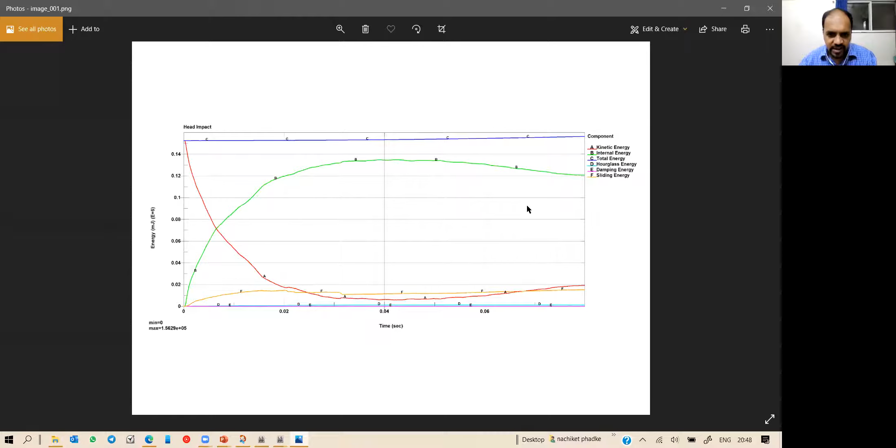To attend this course, you should have a basic working knowledge of LS Dyna. We are not going to learn LS Dyna in this course, we are going to learn the seating system. So those who have already enrolled for LS Dyna training are completely entitled to join this course, because they are anyway going to get knowledge of LS Dyna in due course, and then they can go forward with the seating system training.

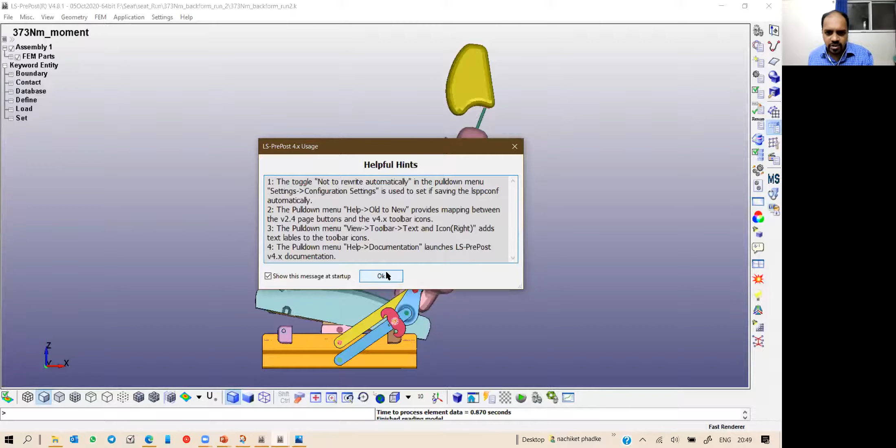The other type of analysis is this backform, 373 Newton meter. If I open this file, you will understand what it is. It's a simple loading condition where the backform is getting loaded. It's a static load condition, or actually the load is converted from dynamic to static, and this is what is happening.

You can see this is a backform, this is a seat, and you are going to push it. Again, this is a seat which is reversible, available on GrabCAD. This is not my seat, this is not a customer seat. We will not share customer data, we'll work on GrabCAD data, so that it's okay for you guys also to publish it. That's my intention.

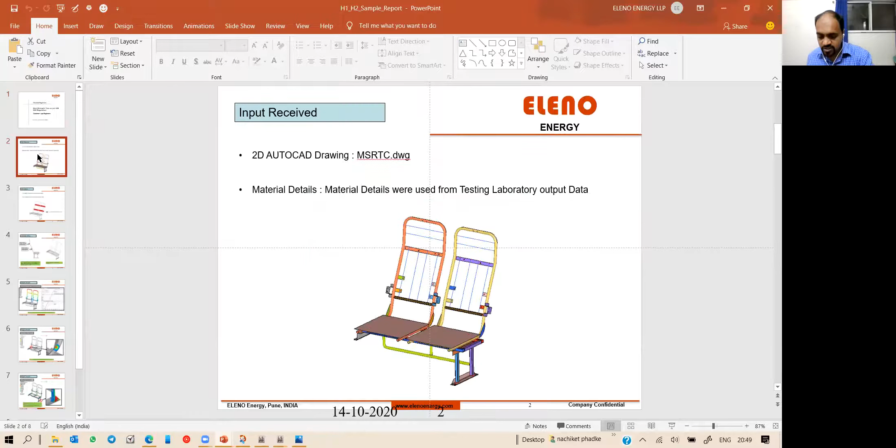These are all the calculations. Another thing we are going to learn is the H1 H2 test, which is a commercial vehicle test devised by ARAI: 1000 Newton at 800 millimeter, 2000 Newton at 500 millimeter, and then you have to check for the displacement.

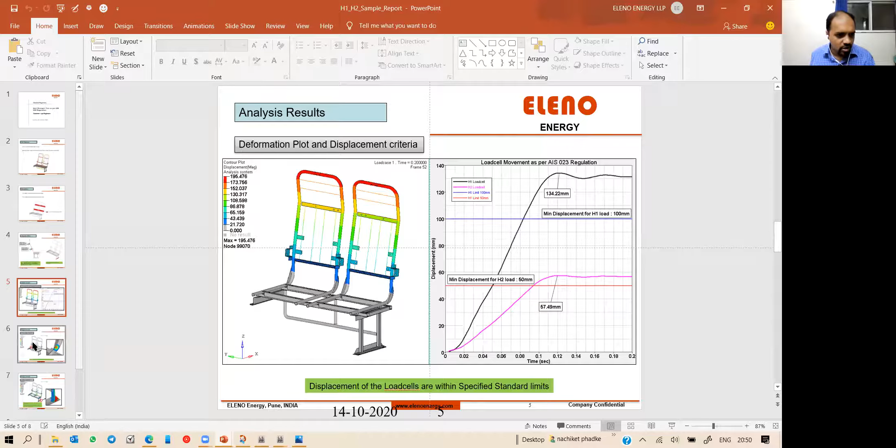These are the tests which we are going to conduct and carry out. This is something I wanted to share - the seat itself, bus H1 H2, correct Sanjay? This is something you are going to learn in seating system design using CAE, that is LS Dyna. Coming back to the course, for next 5 minutes I'll continue, and then I'll open myself for question and answers.

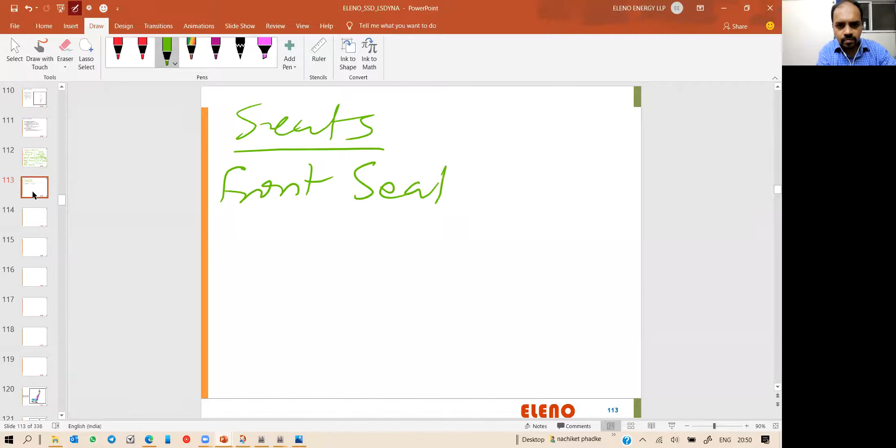The types of seats which we are going to cover are front seat, rear seat, and bus - 3 types of seats, but we are going to cover all regulations 100%. We'll cover all the regulations.

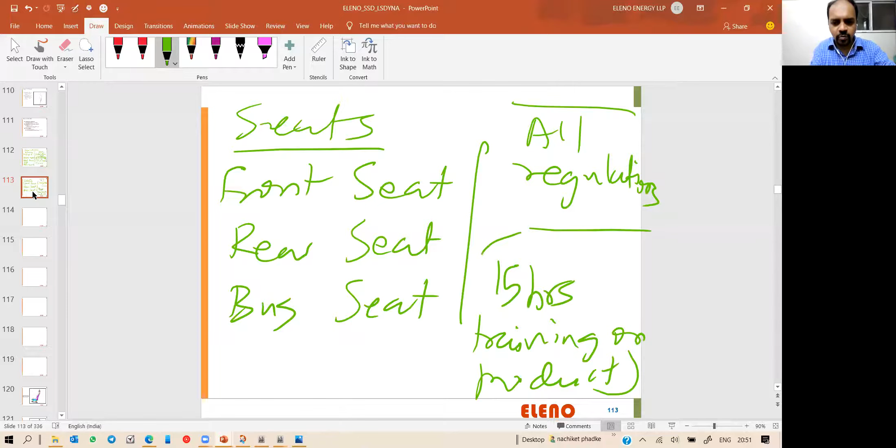This includes 15 hours of training on product. This is going to be recorded sessions, but this will be with you for lifetime. So this includes 15 hours of training, and the regulations are supposed to be solved on ELENO licensed machines.

This is what I'm going to give you access to from the month of November - we are in process of doing that. You'll get access to these licenses, and you will be able to solve it on your own, and it's going to have live support. Of course, I will be training everything live - everything will be live for sure, and this has a prerequisite of LS Dyna working knowledge. I'm not going to teach you LS Dyna for sure.

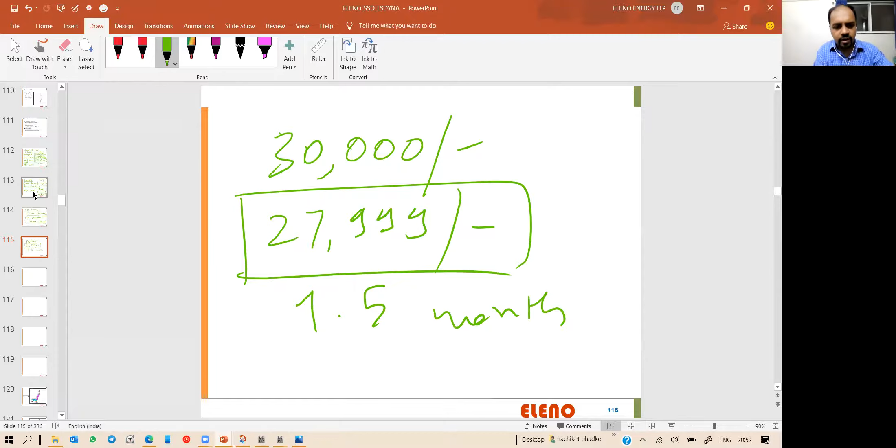It's going to be a 1.5 month course, and every alternate day we are trying to meet, mostly on weekends, but for a longer time. It will be on weekends because most of you will be working professionals, so it will be on weekends but for a longer duration, like 2 hours, something like that, because there will be too many problems, too many questions.

We'll be learning how to set it up - how to actually go and create every single thing: joints, bolting, welding, everything in LS Prepost. I'm making it LS Prepost because that is generic. If I go for ANSA, I need an ANSA license. I have Hypermesh licenses, but sometimes somebody else is not understanding Hypermesh at all. So I'm sticking to LS Prepost for model setup. Anyway, we are going to do dummy setup and all these setups in LS Prepost.

The contact setup, the connections, everything is possible in LS Prepost in the quickest way.

So this is going to start this Sunday, the 18th of October. That's our officially first session. The earlier one was just an overview, but we are going to start working on a seat from the 18th of October.

This is very important. This will be at 6:30 to 7:30, but I have a class, so it's going to be at 8:30 p.m. India Standard Time. This will be a 1 hour class, 8:30 p.m. to 9:30 p.m.

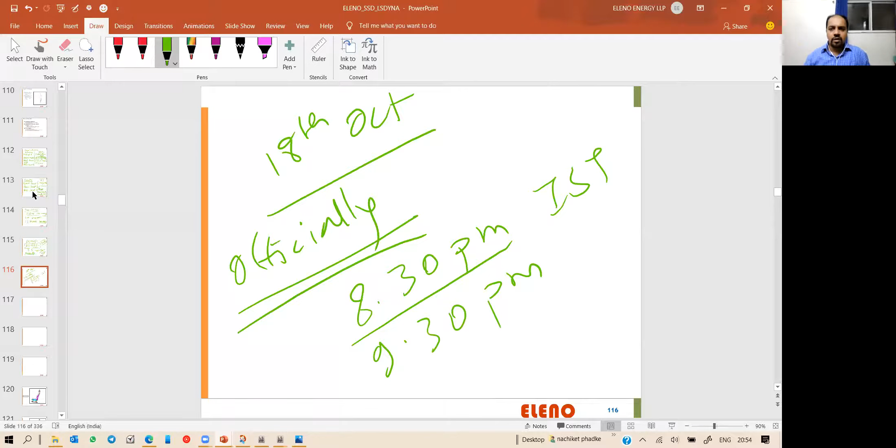And then we will be discussing in the closed batch what will be the suitable timing.

These are the course fees, and if anyone wants to get in touch with me to get enrolled, just make sure — yes, complete CAE analysis including deck setup, everything we are going to cover. This is going to be all CAE related activity, the complete seating system.

We will understand what is penetration removal technique, the types of contacts used in the seating system, materials used in the seating system, post processing, report preparation, and the debug and complete deck setup. Everything we are going to do.